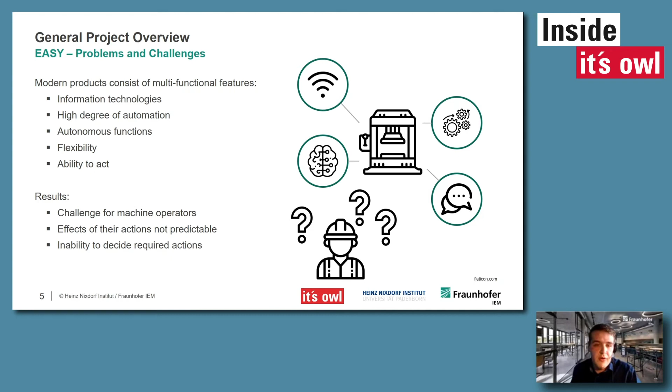This leads to new challenges for companies and especially also for their employees. So for machine operators, it's typically not that easy to understand the modern technical system completely with all functionalities and dependencies, and thereby results of actions in terms of maintenance or, for example, machine setups are less predictable. So to sum up, operators are not able to make the right decisions at the right time and in a target-oriented manner anymore. This is the reason why we are facing some of these challenges in our project.

It's typically the way that prediction of a plant behavior is required, but that typically also needs high efforts for calculations. And if we do that calculations in the cloud, a high amount of communication and data transfer is necessary. So edge computing or embedded computing is a solution that can face this challenge, because we can run the algorithms we have directly on our devices and not in the cloud anymore.

So that we have all our algorithms and functions down to the shop floor, and run that machine learning algorithms directly on programmable logic controllers or something comparable.

So the goal of our project is the development of those AI algorithms for execution on embedded or edge devices. And therefore, we of course have to consider all those limitations in terms of resources we have for calculations. And the big aim is to validate those approaches in different use cases we have.

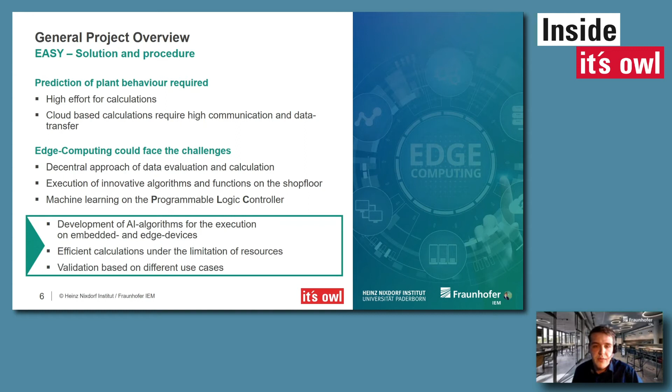So when we are talking about the project EASY, to give you a small overview, the project is for about 3 years. It started in October 2020 and will go on to 2023. We have defined 8 work packages in 3 use cases.

And if I say we, we are 5 different project partners, shown here. On the German side, we have the Fraunhofer IEM and also the company Encoway and Lenze. And for another use case, the company Düspohl. On the Canadian side, we have our partners from Canada, the UVic, the University of Victoria, and the company NTWIST. They work together on a further use case. And all this is supported by the Federal Ministry of Education and Research in Germany and the National Research Council of Canada. So here we have our work and time plan.

We don't have to look into that in detail. What I only want to show is where we are right now. We are in the middle of the project, and the detailed planning goes on and on. The most initial steps are made, and now we are going into more detail for our use cases.

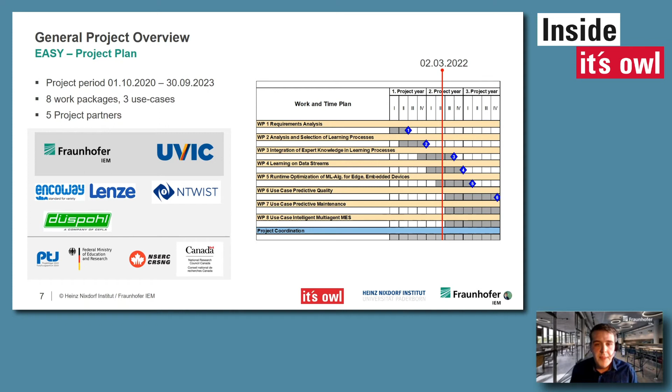To give you a small overview of the use cases we have: one is the predictive quality use case, together with Fraunhofer IEM and the company Düspohl, about the RoboWrap, a fully automated profile wrapping machine. There we are analyzing the impact of roller wear and tool characteristics in this wrapping process, so we want to set up an intelligent algorithm able to react to roller wear and tool characteristics and predict how this affects quality. Our aim is a demonstrator for AI-based quality prediction on an edge device.

Another use case is the predictive maintenance use case with Lenze and Encoway. There we want to focus on condition-based maintenance of stacker cranes, mainly fault prediction in high bay warehouses for those stacker cranes. A very important aspect is the integration of expert knowledge to improve data efficiency and algorithm efficiency. We want a demonstrator for multi-sensor based intelligent fault prediction.

The third use case is mainly where our Canadian partners are working. It's a manufacturing execution system where they also build up digital twins to improve performance. They have several agents they have to coordinate between, and the main goal of this use case is an effective AI-based decision support system for an intelligent manufacturing execution system.

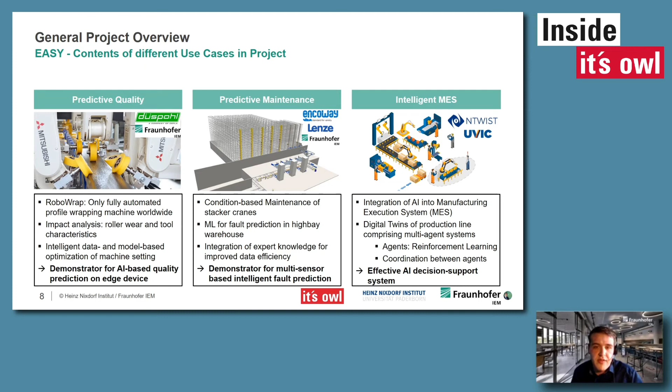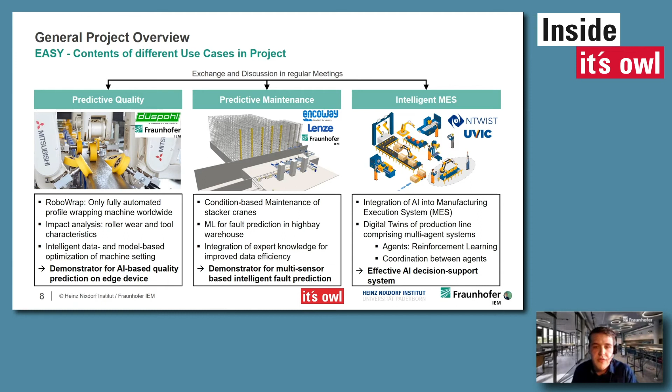Those use cases are related together by regular exchange and discussion. We have regular meetings where we discuss our problems and challenges and support each other by finding solutions and going the next steps. What we want to do now is focus more on a specific use case, going into detail for the predictive maintenance use case.

The introduction will now be made by Mr. Heiko Stichweh from Lenze.

Maximilian, thanks for the introduction. I would like to introduce the use case for predictive maintenance, and therefore I would like to give you an idea of what a stacker crane is. A stacker crane, or automated storage and retrieval system, is the main part of a fully automated warehouse. Here you can see a stacker crane system for containers or totes.

Stacker cranes are able to pick up totes, containers, or pallets, or to store them. You can use them in high bay warehouses, so it's a space-saving solution, and this is the biggest benefit: a fully automated solution that can be directly coupled to MES and ERP systems.

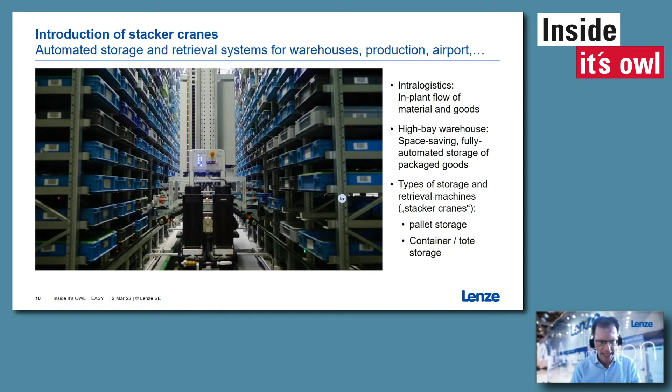Therefore, products that are needed can be sent to production or to the final customer, or can be stored. Here you can see a second stacker crane system for pallets, and you can see it is comparable to the container solution. As explained, these solutions are fully automated, and lots of goods are inside one aisle.

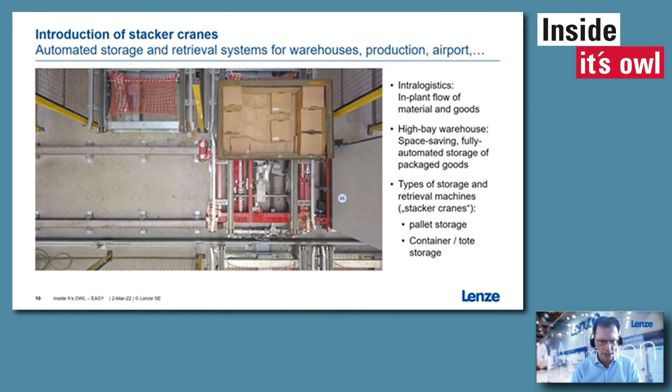So why is this topic so important for predictive maintenance? The reason is when one of these stacker cranes has a defect, all goods stored inside one aisle can't be reached and can't be used for production or for sending to final customers. So the challenge for the plant operator is to secure high availability of warehouses and a high overall equipment efficiency.

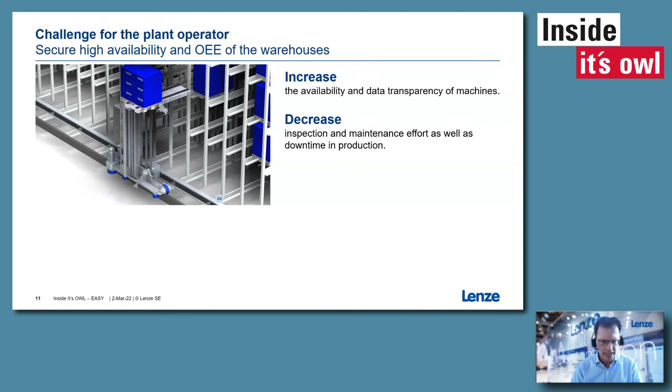Therefore, we are focusing in this project on increased availability and better machine transparency, so better transparency about the condition. We would like to decrease inspection time, maintenance efforts, as well as downtime in production. In the beginning of the project, we looked at lots of service documents and inspection documents.

We found out that mostly the relevant parts that lead to failures and standstill times are mechanical parts of the application. Normally it is not the motor or the inverter that makes the speed control which leads to an unplanned standstill time. Normally these are belts that lose their tension and fail in operation.

Here you can see some driving wheels. Of course, we have big wear here on these driving wheels, and they can slip. Here you can see guiding rails, and of course here too we have some wear. And inside the drivetrain, there are lots of bearings.

There are some gearboxes, gears, some brakes, and all these parts there we can see wear, and we would like to measure the condition of these parts. Of course, today there are existing solutions. Most of them are based on vibration and oscillation analysis, so you have to integrate more components.

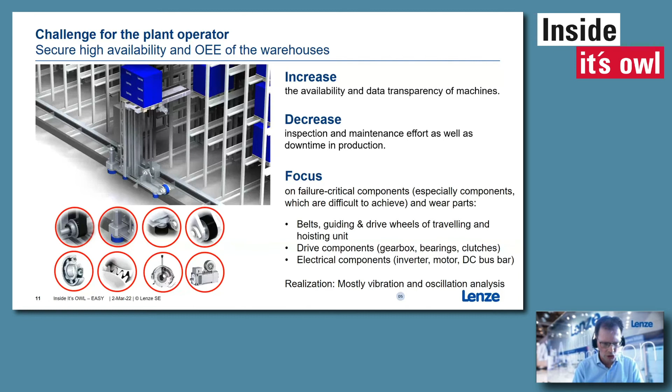Our idea here in this project is to use the existing infrastructure. So if you have a stacker crane application, which can be seen on the left side, then the traveling unit and the hoist unit are driven by speed variable drives, which consist of motors and inverters. And these drives can offer a lot of data like speed, like torque, even with high frequency. Based on these data, and of course our domain knowledge and maybe some additional sensors, we can realize a condition monitoring solution in order to make predictive maintenance available. That is the idea. And Lenze is producing those drives and inverters and also software components. So here we have a good opportunity to offer data, to offer functions, to offer also domain know-how.

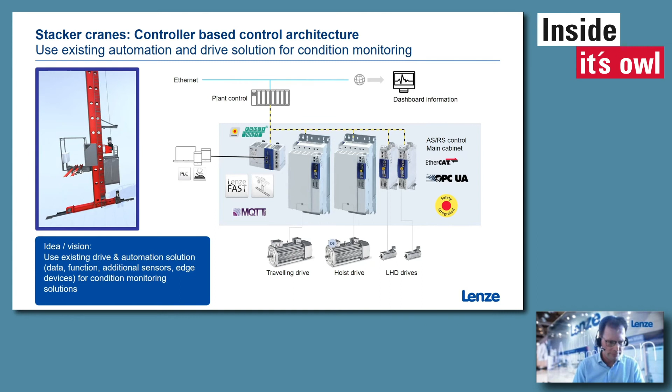Of course, we would like to test the solution under really operational conditions. And therefore, we would like to integrate the results of the project EASY into the so-called Lenze Mechatronic Competence Campus. What is the Lenze Mechatronic Competence Campus? It's a new building, a new place for production and for manufacturing in Extertal. And here we have a really highly automated storage system, which is totally new and will be active in autumn of this year.

And we also have here a new facility where development and production are near to each other, and where we would like to enable agile interdisciplinary development in teams in open plan areas. And this project here is a really good starting point also for these activities.

Inside this new mechatronic competence campus, we have 8 storage and retrieval machines, 5 for pallets, you can see them here, and 3 for containers. So we have at least 8 of them and comparable types, so we can get lots of data of these types in order to train our AI and, of course, to test the system.

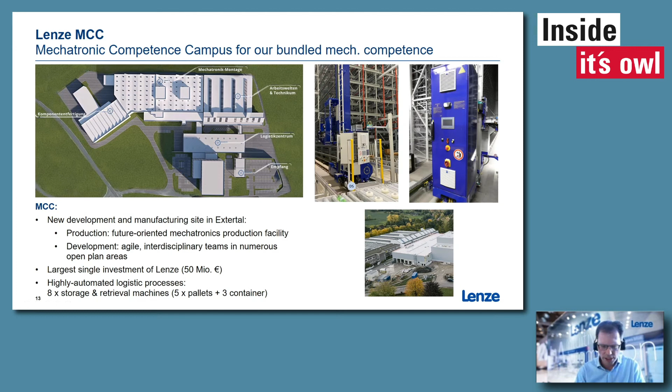Of course, our operation will not be amused if we integrate some worn parts here in order to learn how a worn part will behave. Therefore, Lenze has also realized a testing possibility in our laboratory. Here you can see a small stacker crane solution. It's a model, nearly comparable to the big one, but smaller. On this model, we are able to reproduce typical wear patterns. And here we can design, train, and test the algorithms, and of course also the infrastructure.

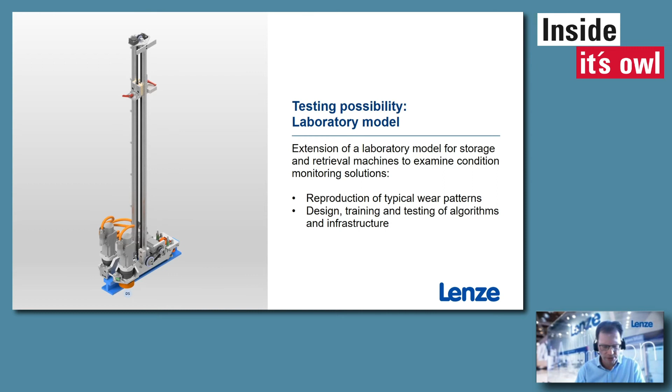How is it possible? Here you can see more detailed pictures of our testing system. Inside the system, we have the opportunity to change those driving wheels and to insert some worn or damaged driving wheels so that we can measure the behavior of older driving wheels. And, of course, we can change the backlash of guiding wheels and so on.

As explained, we can use the data coming from our drive system and automation solution, as well as the possibility to integrate further sensors. I think we will show you some additional vibration and acceleration sensors we are working on and would like to integrate. These can also be integrated in the system, and the data can then be sent and offered to our AI algorithms.

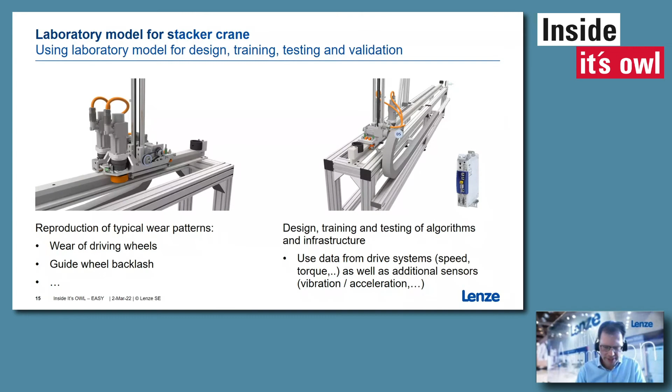So you have already talked about the additional sensor boards. So I want to start into the part of trusted machine learning for predictive maintenance by showing you first of all, as an introduction to all this, the architecture we have. So this is a more simple picture to show you what data we have and how some components communicate with each other.

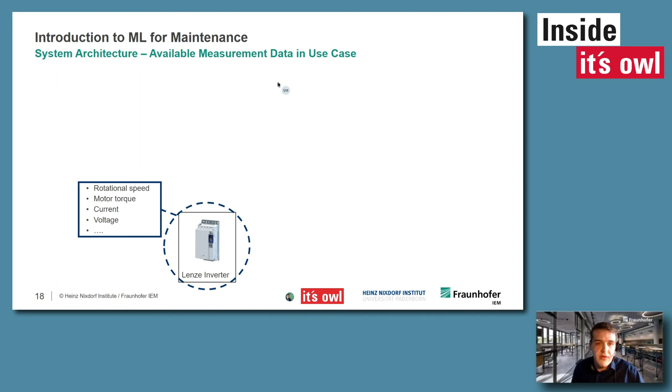First of all, we have the Lenze inverters, and from those inverters we get, with a high resolution, information about speed, motor torque, current, voltage, and so on. So all those control information for the stacker crane, for the drives. And, of course, this is needed to actuate the stacker crane.

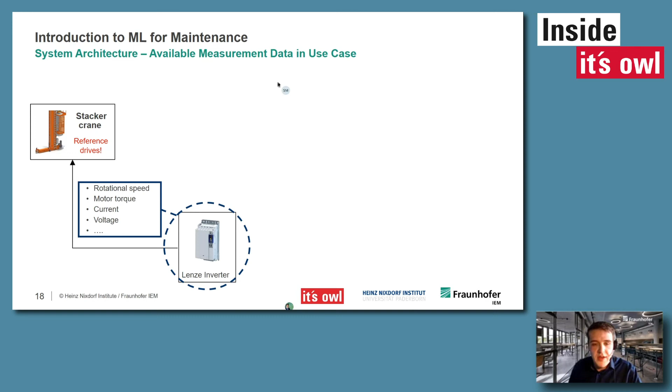In the real behavior and also on our test bed, we want to do reference drives. So with a specific velocity and acceleration, we want to accelerate the system to get reference drives. Also, those data can then be sent from the inverters to the edge device we want to use. There's a Lenze software running, and there we want to integrate, by Docker containers, our machine learning models that are then able to make predictions on the actual system behavior.

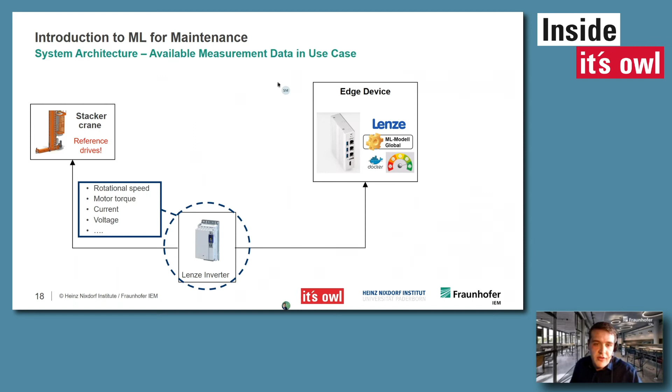And as Dr. Stichwe already mentioned, we plan to use an additional sensor board. So this is shown here. It's a microelectronic sensor board out of the low-cost area we want to integrate, additionally to those inverter data, to get information about vibrations and acoustic emissions and also maybe the temperature.

We are relatively optimistic that we can use data from the inverters and motor data to get good results for monitoring mechanical components. The sensor board is only an additional feature with which we hope to get higher accuracy in fault detection. From the edge device, we can send data into the cloud to store all the big amounts of data we will get over time.

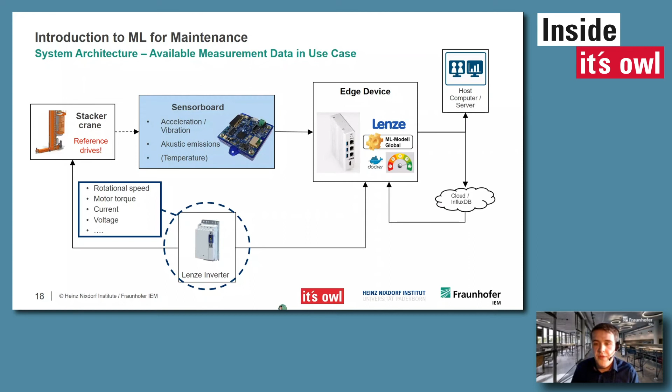In the cloud, we can run machine learning algorithms, but then compress those algorithms and deploy them back on the edge device where they can run in real time. From that edge device, we can give predictions to a server or host computer, for example to an operator, to directly get the information. And this will work even if the connection to the cloud has failed, if we have already deployed the model.

So let me come to the introduction of machine learning in this case. For those of you who don't know what machine learning is about, it's a subdomain of artificial intelligence. It's about algorithms that are able to learn desired input-to-output behavior in an automated way from data. In contrast to traditional approaches, where rules for decision are typically defined by human beings, here the rules need not be identified because they are extracted automatically by the algorithm.

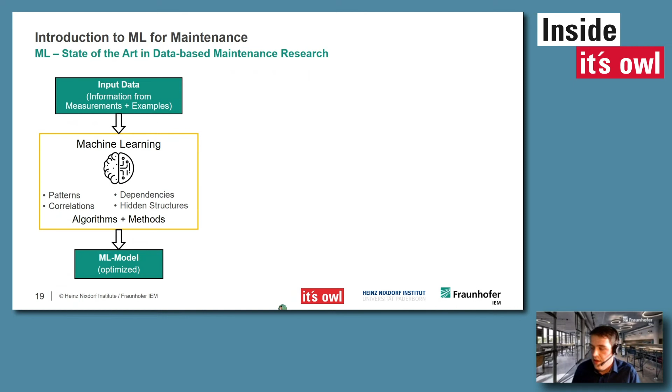There are several application areas, for example image classification and segmentation, control tasks, and of course what we are talking about here: predictive maintenance, or in general condition-based maintenance.

The benefits are, for example, that we are able to identify hidden trends and patterns with high complexity, also in multidimensional and multi-variety data. This means the algorithms are able to detect even more complex dependencies than a human being could extract from the data by manual analysis.

Furthermore, it's the next step of automation, because this is a more automated way to do predictive maintenance, and it's also very dynamic in terms of adaptability to new data or new use cases.

And of course there are a few challenges. One of the most important ones is data acquisition. We don't need just any data, we need really defined data - data that is relevant for our use case and acquired in an adequate way.

Another challenge is the interpretation of results and decision making, since these machine learning algorithms have a black box character. This directly leads to the next challenge, error susceptibility. We have a lack of safety if we do not have enough data, or if there are gaps in the data, and then we want the system to predict despite such a data gap in the future. This can give us unpredictable results for prediction that may really be failures or failable.

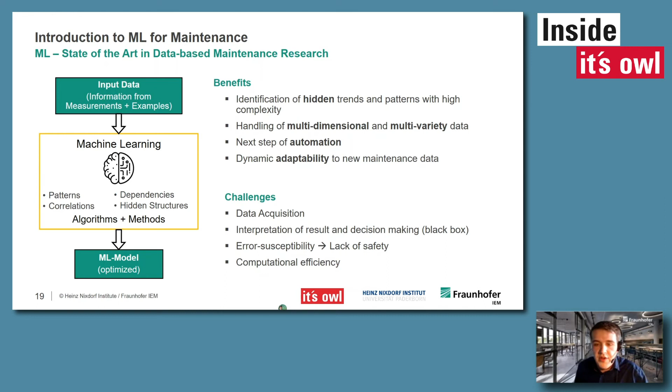And of course we have to be aware of computational efficiency.

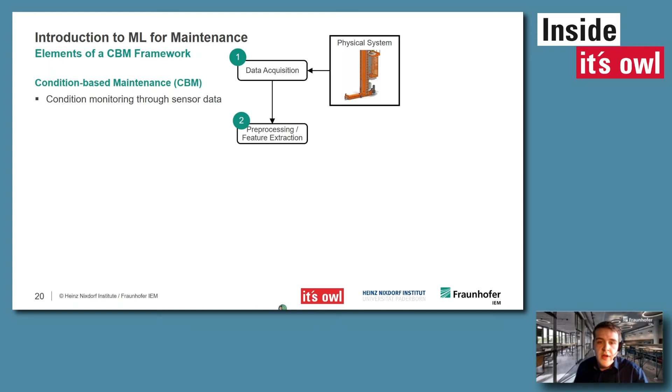Also the feature extraction, so maybe manually extracting relevant features from that data, and then doing diagnosis by, in these terms, a machine learning algorithm. That means fault detection, isolation, and identification.

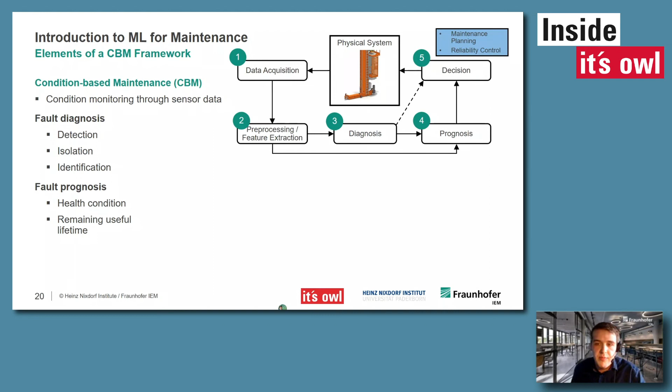In the next step, we also do prognosis, which means predicting how the condition of the system will change, and also what the remaining useful lifetime is - how long the system will be able to run further, also for subcomponents. And then we can make a decision in terms of maintenance planning and reliability control, and react accordingly for our system.

Typically, in the case of condition-based maintenance, we use supervised learning, which means that we have labels available for the data. And label means a feedback about the system health, so that we know for every data we have, how the system condition is like.

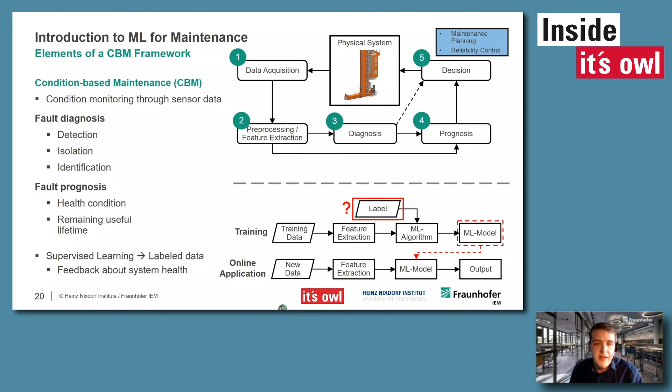And in maintenance, there are two principles we have to look at. First of all, the label has to be complete, so it has to contain all the relevant system information about system conditions that should be predicted in future. And another aspect is the granularity of the label, because you can only distinguish between conditions that are evident from the label. So this is a kind of resolution of the prediction we can make.

And there we can, on the one hand, have the granularity of fault description. This can be shown, for example, here by this image for a stacker crane, where we have several subsystems of the whole stacker crane and also components of those subsystems. And for each component, we can also define different wear mechanisms or defects, so fault types we want to distinguish between, and this has to be a part of the label so that we can distinguish.

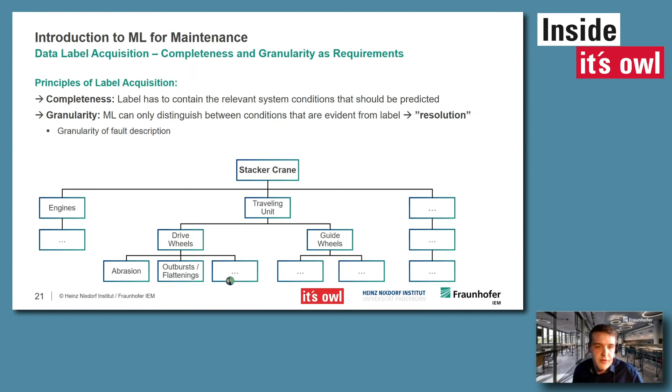If we don't have a label at such a level, it's a top-down approach. So if we don't have the label here on the lowest area, we can maybe only make predictions for a whole component in general or a whole subsystem in general. So this is something you have to be aware of if you want to do condition monitoring by label.

And also we have the granularity of fault progress, which means how to describe the faults on the time axis. So for condition monitoring, we can have binary or discrete descriptions, but also continuous. Binary, for example, would mean only distinguish between health and defect, whereas continuous would mean, for example, a percentage health of the system.

And on the other hand, we can also consider the time horizon, so then we are able to do predictive maintenance on data. And this means always have a reference to the time of failure. And here we can also have binary, discrete, or continuous states. But of course, the best information would be the continuous one, so that would mean a remaining useful lifetime for the system. And this together makes the granularity of the label.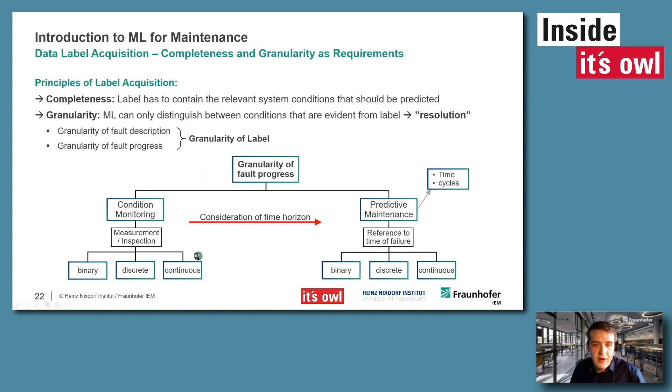And a very important aspect is what are sources for label acquisition. So there we can use digitalized maintenance or service reports and also general information about component replacement. And also it is possible to measure wear-describing variables, for example, by sensors, but also manually by operators directly at the system. That are the opportunities we have.

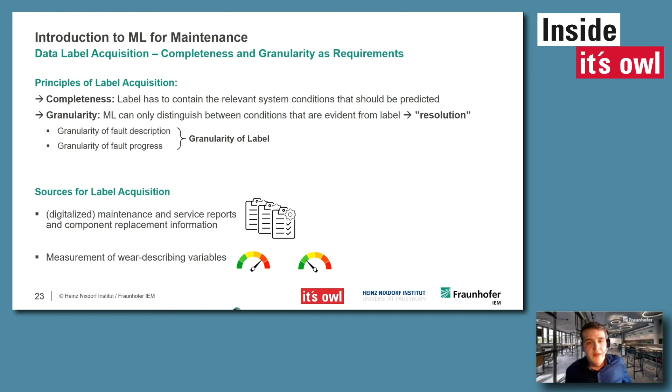And if we don't have a label, this is important to say, then we can not predict directly faults, but we can do anomaly detection. So detect whether the system behavior changes from the typical behavior.

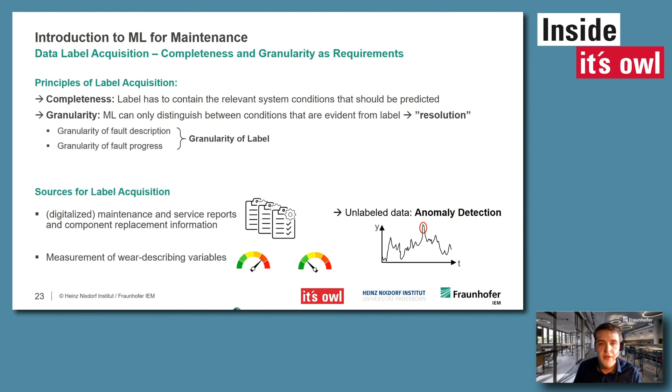So let's now come to approaches of Trustful AI. This is something we are focusing on in the project, next to bringing the algorithms to an edge device.

So typically in maintenance, we have the problem, first of all, that we have lack of data. So for example, missing labels or sparse examples, because a system like a stacker crane does not fail every day, so we do not have much data about that. And also the data balance is such a challenge, because if you remember such a system, 95% of the time it will be healthy, and only the rest 5% are really relevant for failure mechanisms.

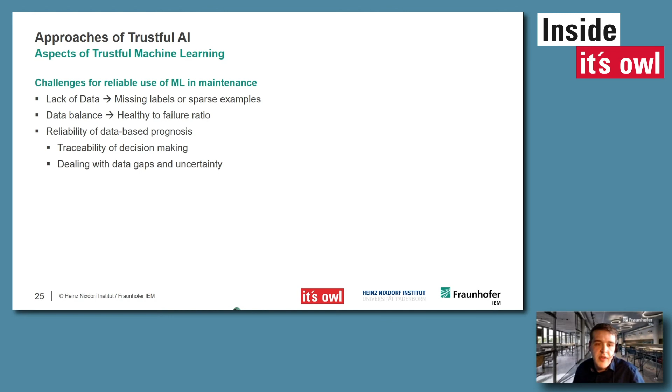And this healthy to failure ratio we have to consider by, for example, balancing our data sets we are learning on. And also we have the case or the topic reliability of the prognosis. So the traceability of the decision making, what can be really complex if we use AI algorithms. And also a question is how to deal with data gaps and uncertainty.

And a solution of that is informed machine learning. So there are some or three areas we can define for that. First of all, we want safety of the prognosis through self-evaluation. That means a safe training of the algorithms and a safe usage also, for example, by considering and analyzing data gaps.

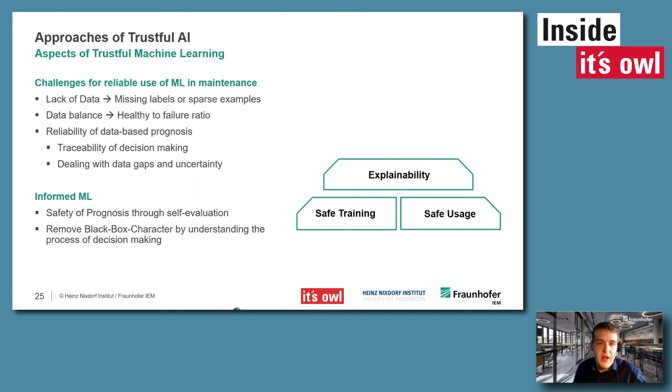Also, we want to remove the black box character by understanding the process of decision making, which comes to the topic of explainable artificial intelligence. And on top of that, there is the point adaptability, so that means influencing the algorithms for wished behavior.

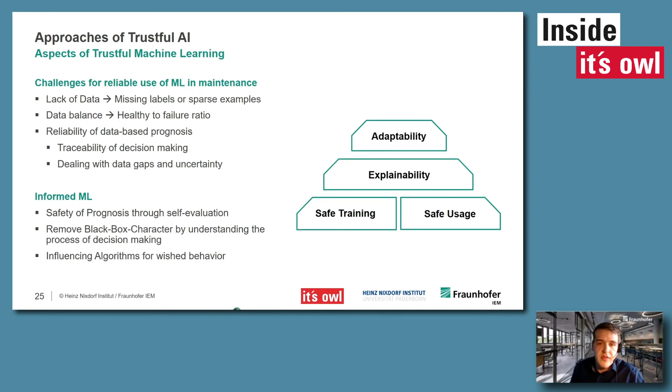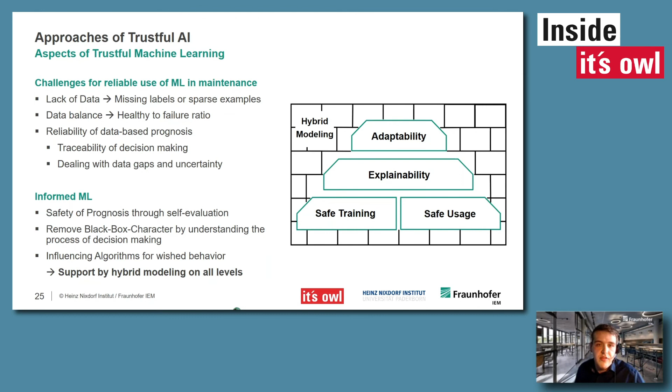And all this can be seen in the context of hybrid modeling. So hybrid modeling means feeding expert knowledge to the system to make use of the rules from the expert knowledge and to support all this decision process and to understand the system and how to affect it, the AI-based system.

Concepts for decision support in machine learning include, for example, synthetic data by model or by testbed. We have seen the testbed in the beginning that Dr. Stichwey showed us, so we can learn on that data and make a transfer learning approach to bring the machine learning algorithms we have learned on the testbed to our real application.

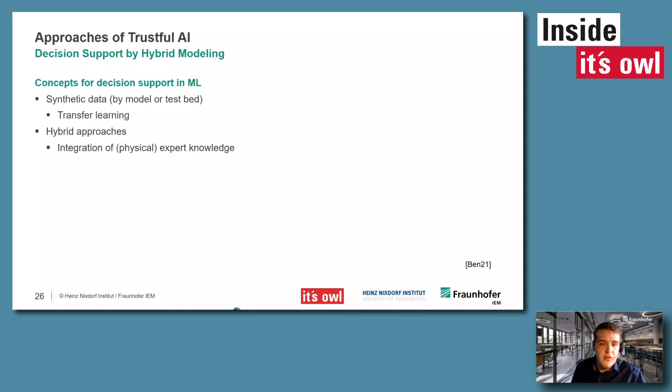We also support this by hybrid approaches, integrating expert knowledge, for example by physical models. The idea of hybrid modeling is shown on the right side.

A really data-based approach would look like this one we have on the right now. We have training data, we train the model, and we make prognosis on our measurement data. Classically, model-based diagnosis techniques were used in a parallel way.

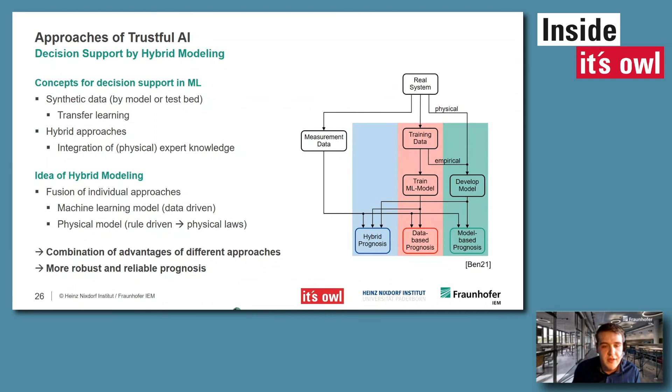But if we talk about hybrid prognosis, we want to combine both approaches to benefit from the advantages of both: on the one hand, the ability of machine learning to automatically identify complex patterns and hidden relations, and also the model-based or physical model-based approach to make all this more robust and reliable.

This integration of expert knowledge can look in different ways. We can have a parallel approach where we have machine learning and a physical model next to each other, and their outputs can then be fused by a decision fusion system to make a prediction.

We can also have serial or parametric approaches, for example where a physical model gives output like residuals or parameters to the machine learning algorithm in addition to the input data we measure, and then we can predict.

We can also change this system so that the machine learning comes before the physical model, so that the machine learning supports the physical knowledge where we don't have physical rules for some subsystems, allowing us to integrate machine learning into the physical model.

Another topic we've talked about is the transfer learning approach, where we can give control signals to physical models or also to a test bed we have, and then use this to train the machine learning algorithm on that data, and then use it on a real system.

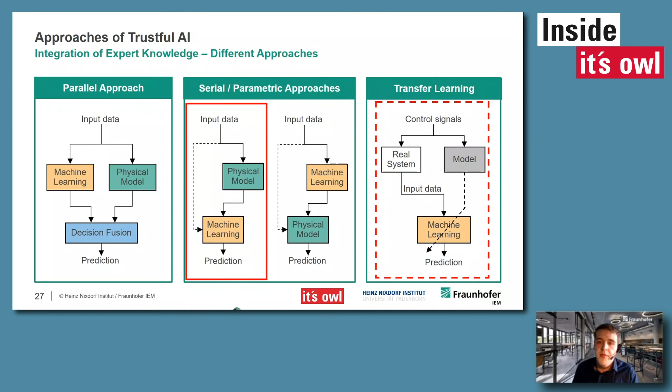So these are the approaches, and what we are focusing on in our use case is, on the one hand, the serial approach with physical knowledge before machine learning, and also a kind of transfer learning from our test bed. So the procedure in our project context finally looks like this.

Here we have a hybrid architecture we want to try out on our data. The input here is already pre-processed time series data where resampling has been done and so on. Then we can do domain transformation, since we expect the frequency domain to be mainly important for extracting the faults we want.

Then we get a feature extraction layer by a convolutional neural network, a special form of neural network that is able to find features and hidden relations in our data, and is also able to look at multivariate data together. We can also do manual feature extraction, which is the first kind of expert knowledge we give into the system.

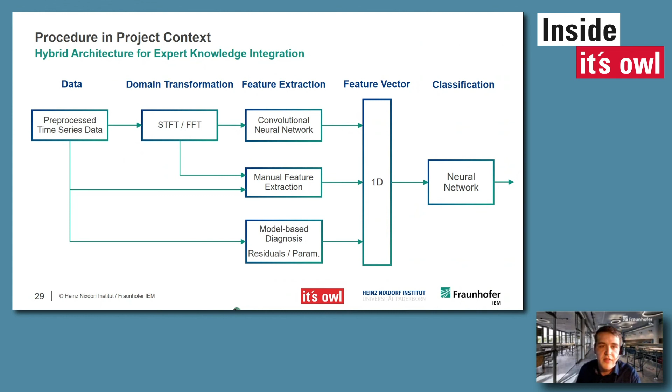We also want our model-based diagnosis running in parallel, where we can calculate residuals or parameters by physical law. All of this we combine into a feature vector, and then make use of a simpler neural network as a classifier to give us predictions about the system's health, how long it will remain healthy, and when it will fail.

Last important point in this case is the realization on edge devices. Of course, on the edge devices we have limited computational power available, and what we have to do on the edge device is write new measurements to a database, to an InfluxDB in this use case.

We want a direct analysis by our machine learning algorithms as a Docker container. We also have to look at the real-time capability of the physical models we want to integrate - they can't be too complex or too computationally expensive.

Another step is the optimization of the trained machine learning models. There are specific techniques that are actually part of research, for example pruning and quantization, and TensorFlow Lite is a software that gives us those techniques as toolboxes we can make use of.

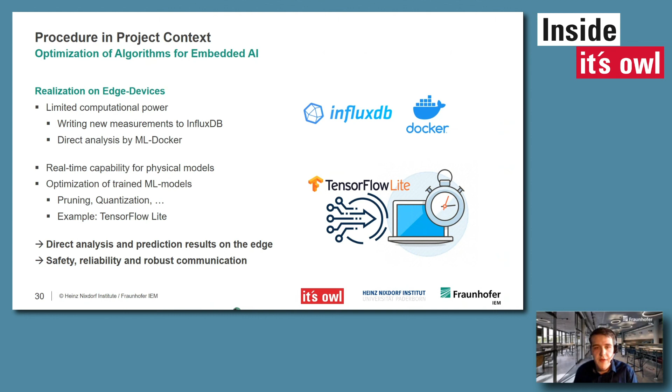And the aim, of course, is the direct analysis and prediction of the results, and all this should work on the edge device. And of course, we have to focus on our algorithms so that they are safe and reliable, and also that we have robust communication by those high sampling rates we have by measuring vibrations and oscillations.

So now I will finish my part, and then I will give the word to Mr. Michalke to come to the general IoT infrastructure where our algorithms will run on. Yeah, thank you, Mr. Bowser.

Of course, we aim to make this run on the embedded device, but let me emphasize again, we are looking at the experimental setting at the MCC, the Mechatronics Competence Campus of Lenze, where we want to extract data to really get high quality data and utilize the experts, our colleagues on the shop floor, to inform our decision making and inform our models.